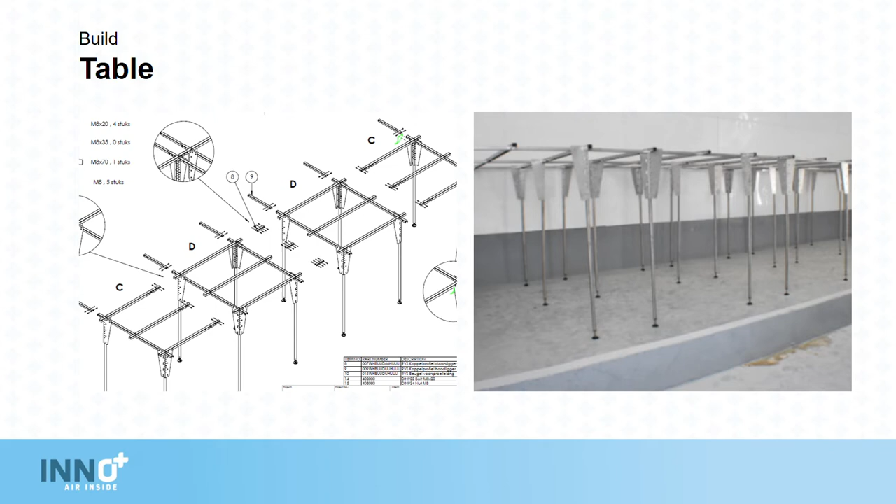Building the table. The tables are built in squares and then connected together to make one big table.

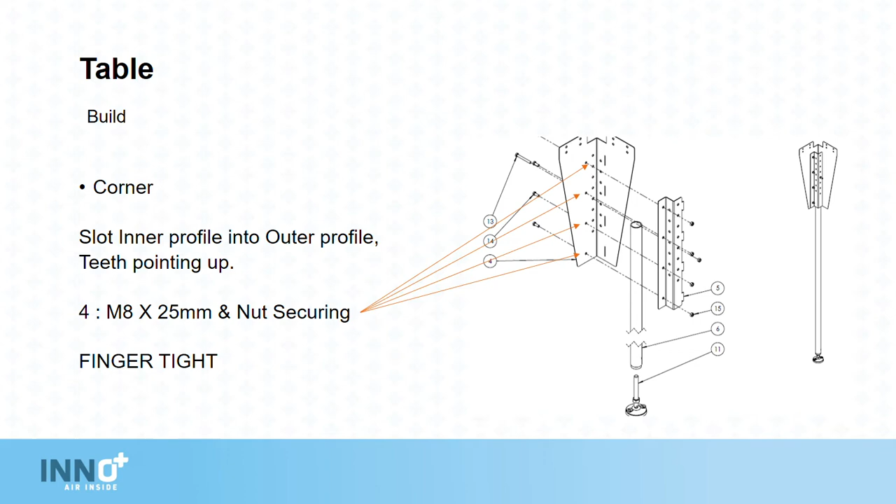Firstly, the corners. Slot the inner profile into the outer profile with the teeth pointing up. Use 4 M8 by 25mm bolts with nuts, securing these only finger tight.

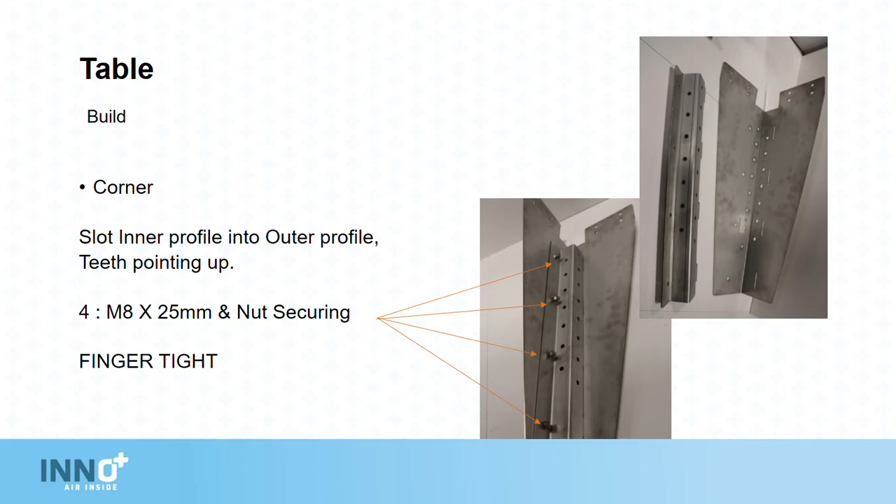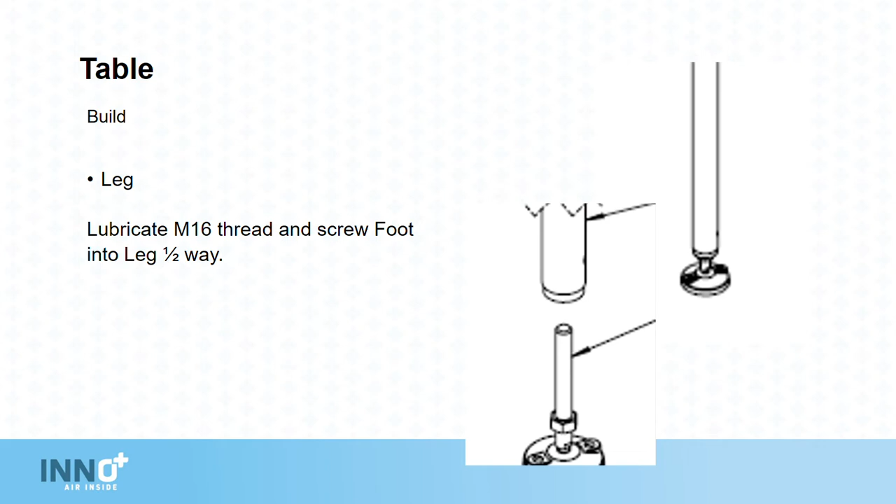The leg. Lubricate the M16 thread on the screw foot and screw it halfway into the leg. Leave the lock nut screwed down to allow for adjustment later.

Slide the leg into the corner profile at the small end. Use a bolt through the holes to set the rough height. For this we use 1 M8 by 75 and a nut, again finger tight.

For the frame, first we connect the lower cross members. These go corner to corner and are secured again with M8 by 25mm nut and bolt, secured only finger tight.

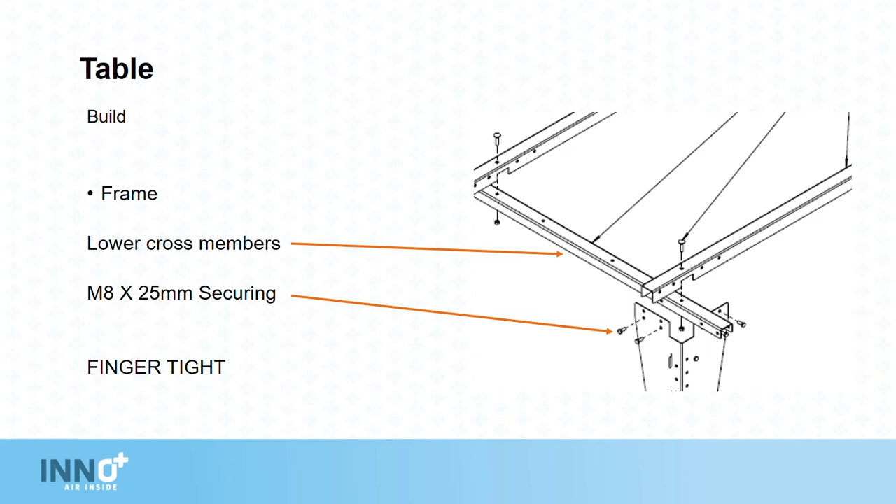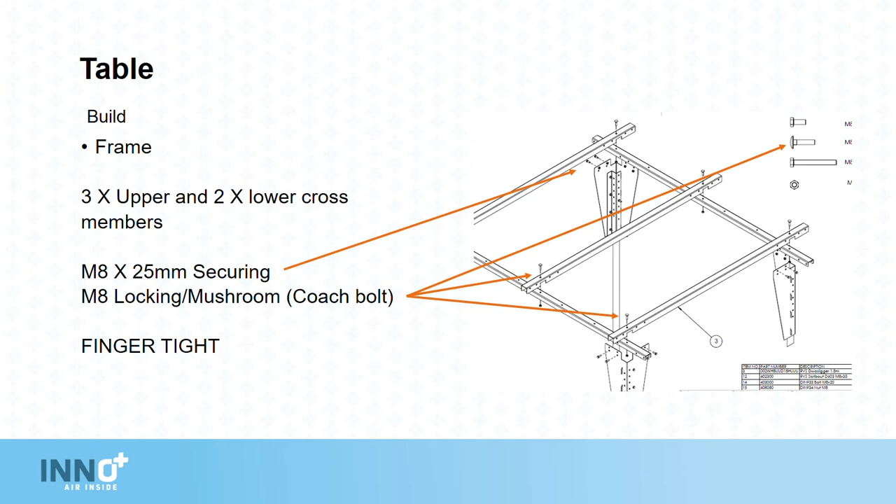After this, the upper cross members. These are secured in place with M8 by 25mm nut and bolt. Also, to secure the top to the bottom cross members, we use an M8 locking bolt, mushroom headed or a coach bolt, with a nut underneath. Again, secure these only finger tight.

Build all but the last table. These are always built finger tight to allow for some movement when adjusting and leveling. Connect the tables together with couple sections as shown.

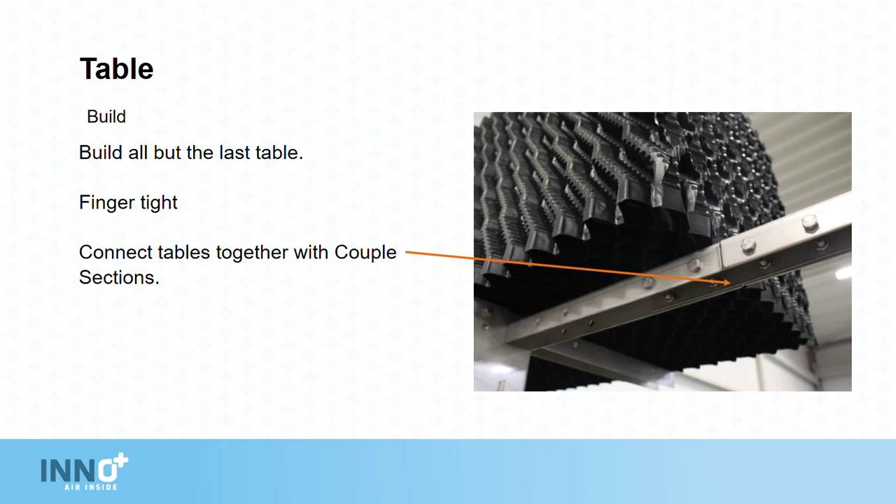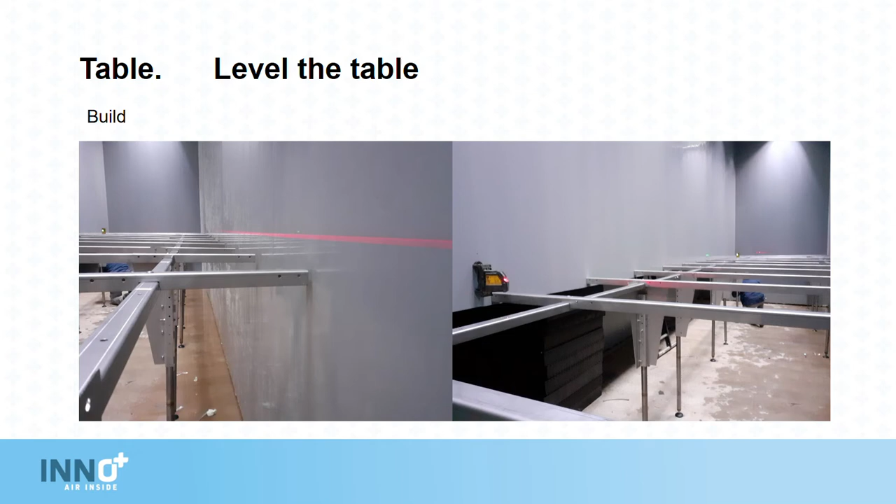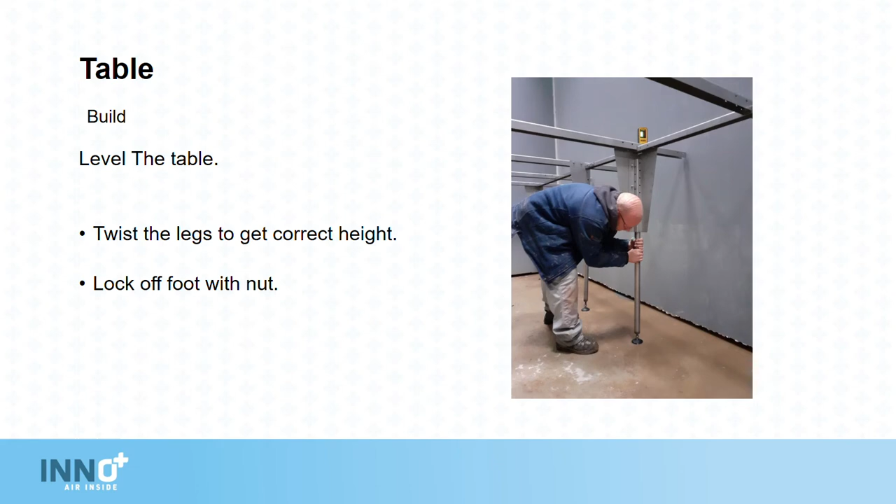Once the table is almost complete, we can level the table up. Twist the legs to get the right height as shown with your level or table or laser level. Then lock off the foot with the lock nut.

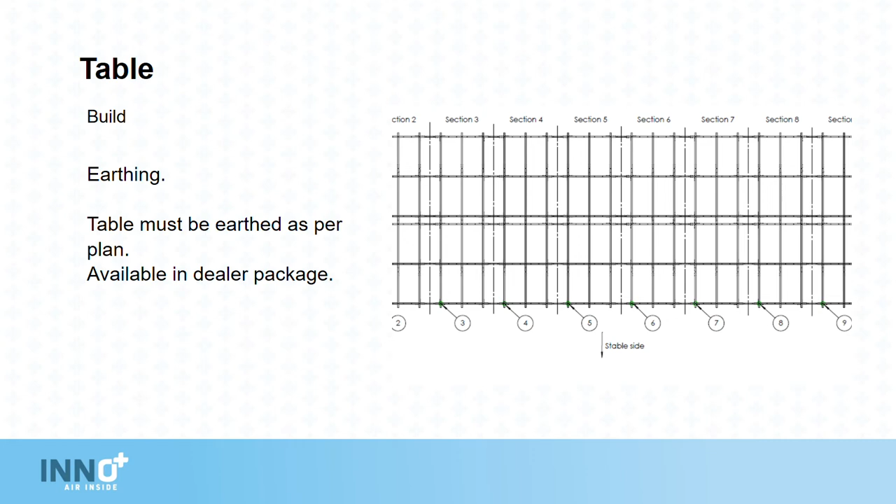Earthing. Tables must be earthed as per the plan in the dealer package. For this we use 3mm stainless steel cable which is provided. Make a loop, remove one of the nuts and bolts, and secure the loop with a washer and the same bolt.

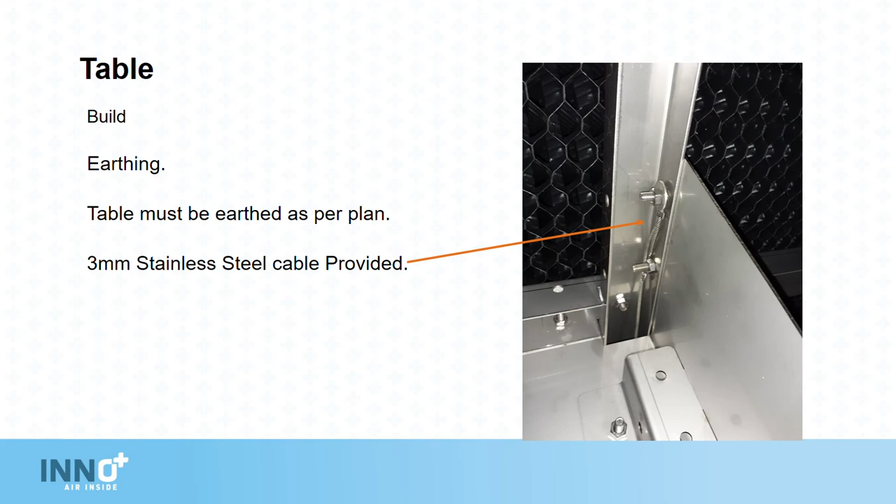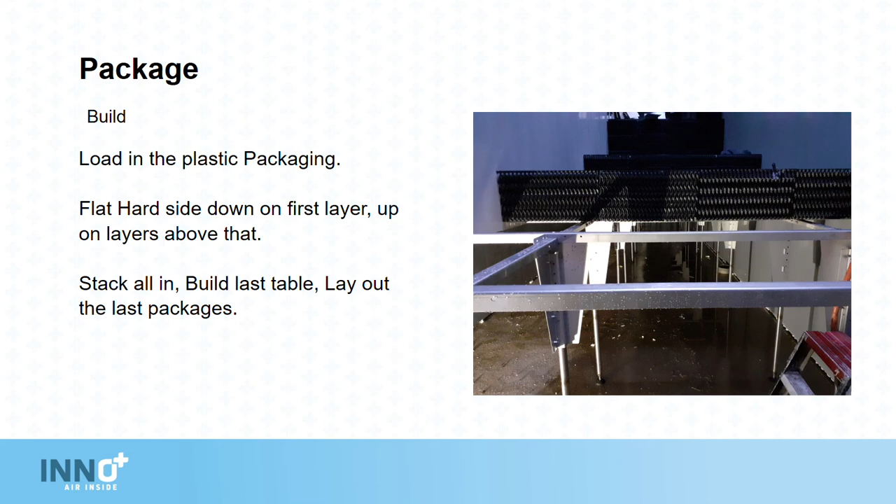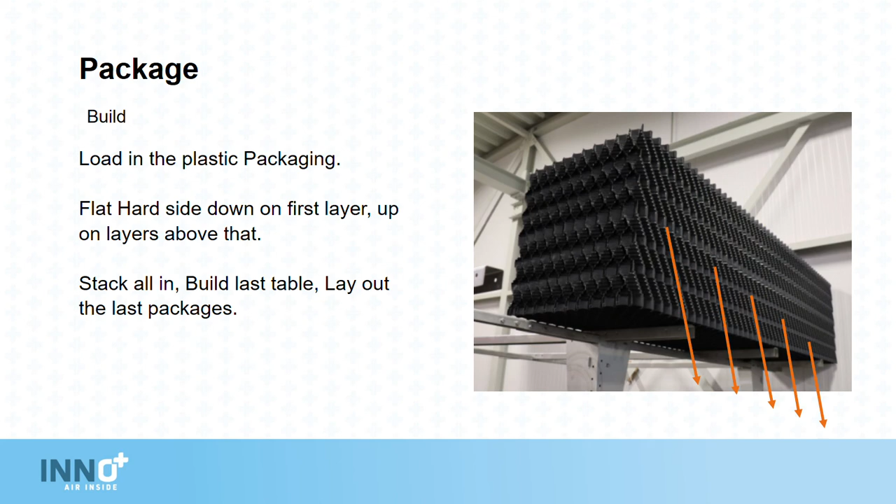When you load the packaging in, we lay the hard side down on the first layer and then up on all layers above that. We stack them all in and then build the last table. Then tighten everything and lay out the last packages.